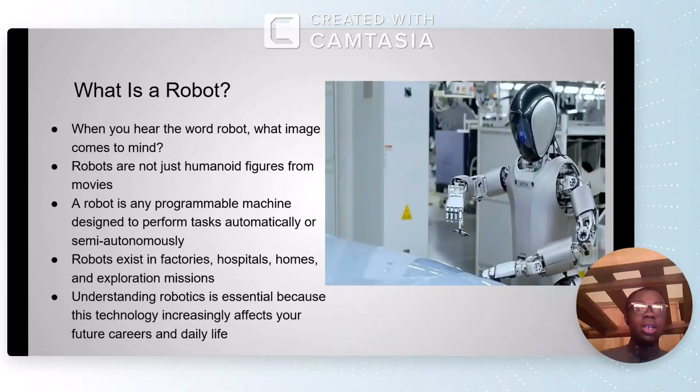So the three core components of every robot are: one, the mechanical structure; two, the sensor; three, the control system. These are the three main components that make the robot function, that sum up to make the robot a robot. As you can see on the image above, you can see the sensors, the mechanical structure, how they structure the robot, and then the system control. So they sum up, made up the machine to work as a robot.

So the first one says the physical body or frame that provides shape and enables movement. So we can see the structure, the body of the robot that provides the shape of the machine. So you can see how the machine is shaped up. That is the mechanical structure that they've designed for that specific robot.

And then we have sensors. Sensors are devices that collect information from the environment, like cameras, pressure sensors, and temperature sensors. So the sensors collect information from the environment. Like there is a sensor that will detect that here is a ground, here is a wall, those kind of things. It is the sensors' work that will do that, collect information and then instruct the robot.

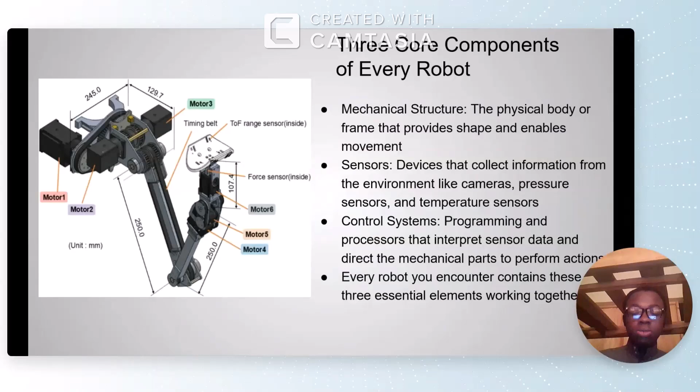And then we have key principles of robot design. First we have automation, precision, efficiency, programmability, and the last one, adaptability.

So automation, robots perform repetitive tasks. The automation is like a default that they've programmed into the robot to act whenever it meets a specific condition, to perform a specific task whenever it encounters that thing. So that is automation, without humans instructing it, or without instructing it as the inventor.

And then we have precision. So robots execute tasks with consistency and accuracy, often surpassing human capability. So the robot is faster than the human being whenever it is executing a task.

That is why many industries prefer robots over human beings because robots are faster, they don't get tired, and they work with the speed and accuracy that you've programmed them for. As far as you've programmed a robot to perform a specific task, it works with accuracy, which simply implies that robots perform with more accuracy and speed than human capacity.

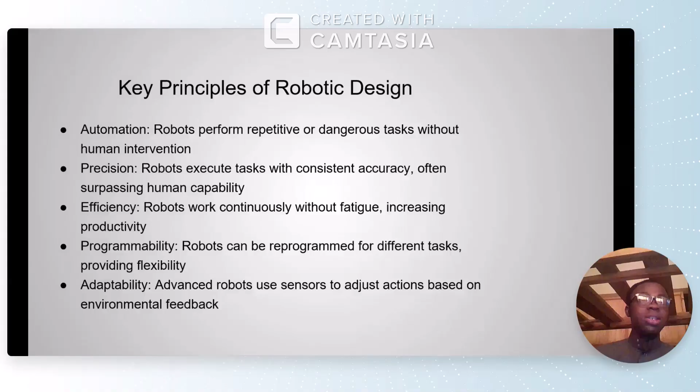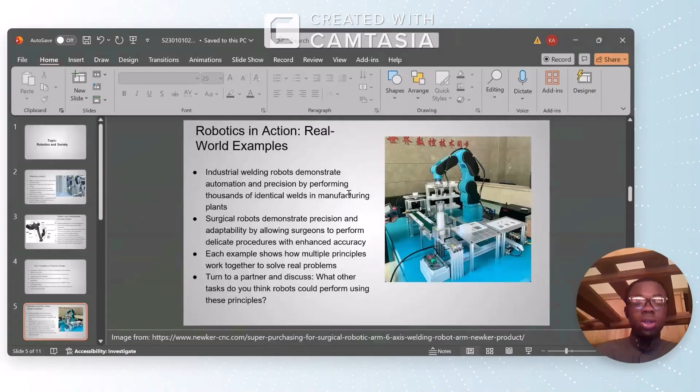So as I was saying, the industrial welding robot demonstrates automation and precision by performing thousands of identical welds in the manufacturing plant. It works according to what it has been instructed to weld, thousands of welds that humans cannot do in a day. A robot can work more than five times what a human can do.

The second point is this: when you go to the hospital, the surgical robot demonstrates precision and adaptability by allowing surgeons to perform delicate procedures with enhanced accuracy. In hospitals, we have robots performing surgery that doctors themselves find difficult to perform. Robots are programmed to demonstrate the same procedure without missing or making mistakes during that operation or surgery, allowing surgeons to perform delicate procedures with enhanced accuracy. They do it without missing or diverting from what they have been instructed to do.

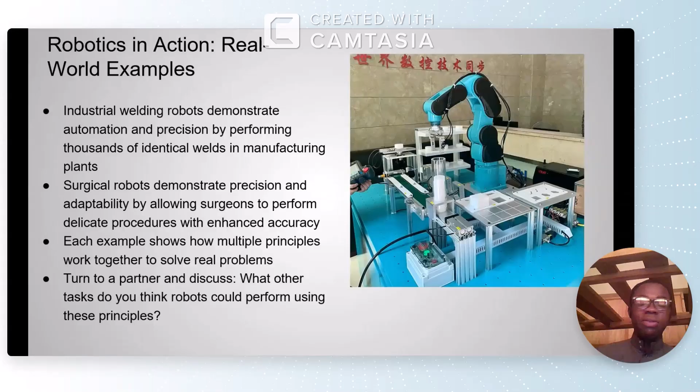And then we have the manufacturing and industrial benefits and challenges. Robots in automotive assembly increase production speed and consistency while reducing worker injury from repetitive tasks. If the robots are doing the work, humans are not going to be part of those things, maybe to get themselves injured or exhausted. So robots are going to reduce the risk of workers injuring themselves.

Others will say I'm tired. The positive impact is very high in the industry because of higher quality products, safer working conditions, and increased productivity. I like those three points: higher quality product, safer working condition, increased productivity.

You realize that when you program the machine to do the same thing repeatedly, it follows that procedure. I'm not talking of human beings - when you work and become tired, the accuracy you started with will go down, and you are likely not to produce the quality product you want. Then safer working conditions - the working condition will be safer for workers around those places. And productivity, as we all know, will increase and go high.

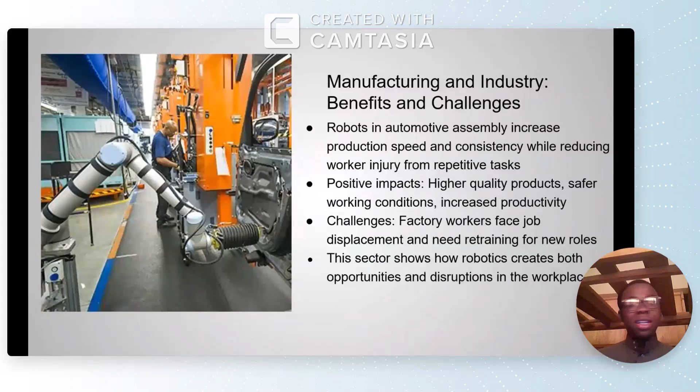And then challenges: factory workers face job displacement. When you realize that robots do what the humans are doing, you prefer robots than humans in the industry.

As I was saying, the challenges factory workers face are job displacement and the need for retraining for new jobs. It will be challenging for the industry and whatever workers or human beings find themselves doing in the working place.

And then the last point is: this sector shows how robotics create both opportunities and disruption in society. As we all know, in everything that we do, we have the benefit or advantage and disadvantages. As far as this robot is concerned, we have the benefit and then the disadvantage too in society.

And then when you go to health and medicine, precision meets access. Surgical robots enable minimally invasive procedures with greater precision, improving patient outcomes and recovery time. The robot is consistent to do what they have programmed to do, and this helps improve hospitals and make recovery time faster.

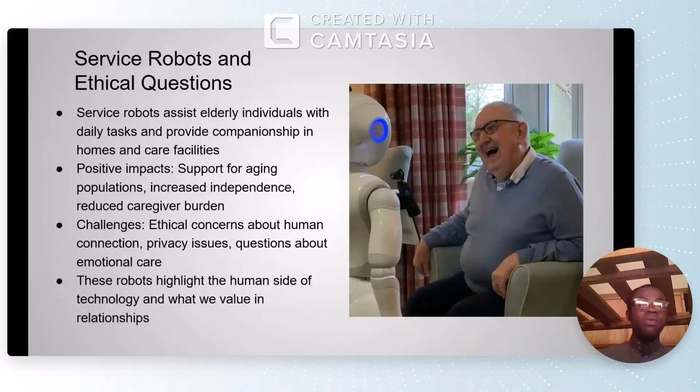And then we have the last point: these robots highlight the human side of technology - what we value in relationships.

And the positive impact of this is scientific discovery and rescue operations. When that happens, we have scientific discovery.

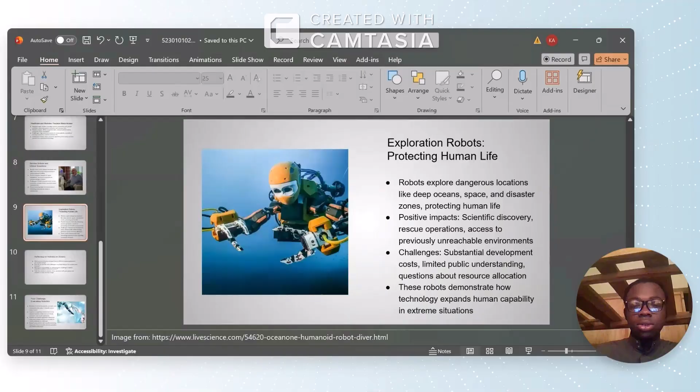And in any place we always have challenges, as I said: substantial development costs, limited public understanding, questions about resource allocation.

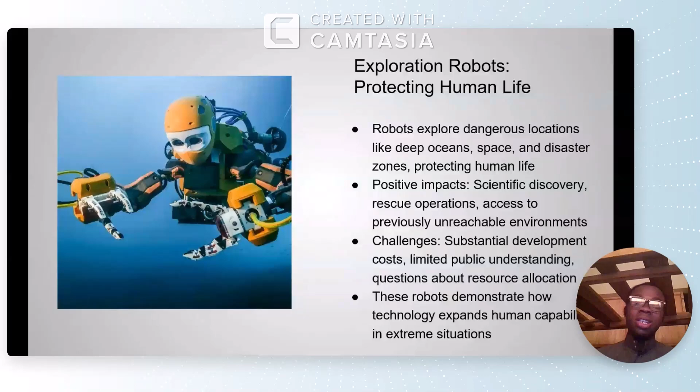So these robots demonstrate how technology expands human capabilities in extreme situations, and then reflecting on robotics in society.

So as you've seen from the beginning till now, you can see some reflections on robots in society - whether they're having a positive impact or bringing some kind of bad effect to society.